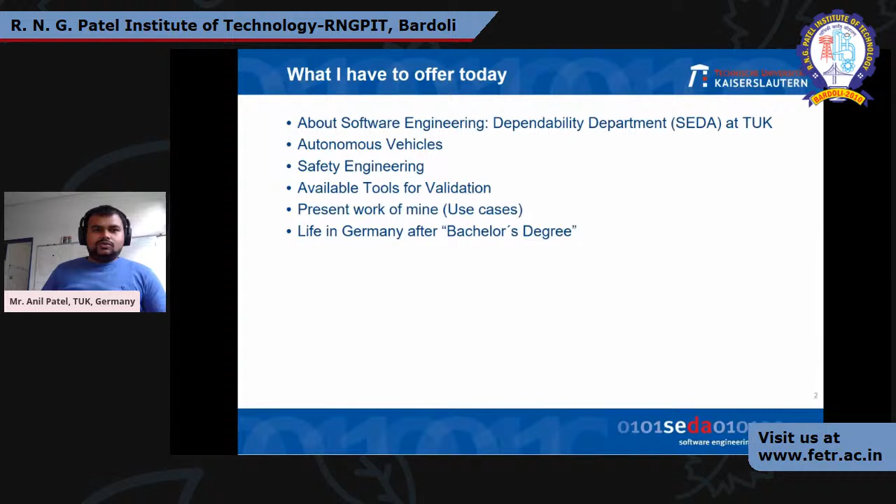So we are the Software Engineering: Dependability Department. Our professor Liggesmeyer is the head of department. He is also director of Fraunhofer Institute for Experimental Software Engineering, which is basically a research institute for innovation in the direction of embedded systems. We also focus on dependability, safety, security, reliability, and availability characteristics of embedded systems, as well as looking for new approaches in dynamic risk assessment.

As well as safety assurance under uncertainty for autonomous systems. Currently, we have two ongoing projects: collaborative embedded systems and virtual engineering of smart embedded systems. My part is dynamic safety management in resilient architecture, which I'm working on right now. You can also look for some information about this research on this link.

So let's start with our topic, which is safety engineering in autonomous vehicles. But before that, we have to find out what is a system and a technical system. A system is the technical and organizational means for the autonomous fulfillment of a task. We can say that whatever hardware, software, people, maintenance, personnel and logistic assistance is considered, it's called a system. So take a railway station or airport where you have an airplane, an air traffic controller, ground personnel for guiding the plane, fuel supply systems, and ticketing—all this is called a system.

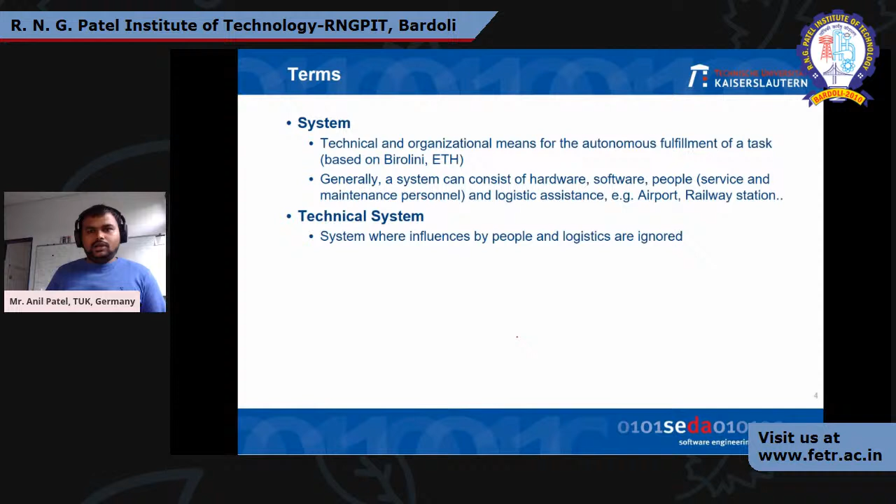Present technical systems have many microprocessors installed, and those vary from not safety critical to safety critical. Not safety critical we can say is your cellular phone, which also has a microprocessor and sensors, but it is not safety critical. Even if your mobile won't work, it doesn't hurt you. However, other safety critical systems are aircrafts, trains, cars, and medical equipment.

Aircraft at 8,000 altitude, if your engine won't work, it's safety critical - lives are in danger. That's why we have to take into account all safety critical systems into safety engineering. And for that, we are evaluating safety, reliability, and availability. But today we are focusing only on cars.

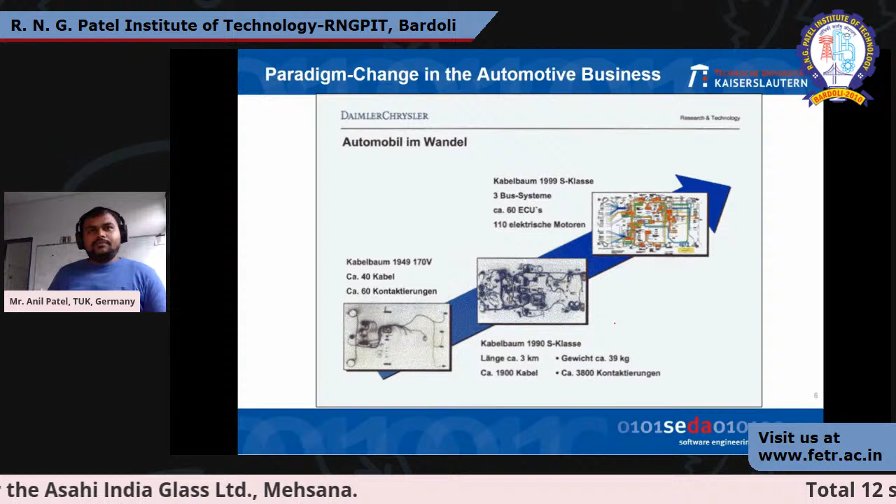So let's look at how the paradigm changed in the automotive business. Let's take a model from 1949 - it has a 40 cable connection and 60 switches. Over the period of years, now we have the 1999 S-Class. There are 3 bus systems, 60 ECUs, and 110 electric motors.

But in present cars, the cumulative length of electric wires in a modern car is more than 4 kilometers compared to a few hundred meters 30 years ago. And in modern cars, up to 150 ECUs are used, in commercial up to 40. So what I mean here is there's been dramatic change from mechanical components to electrical components, and those components are vulnerable to some environmental changes, and those things we are evaluating today.

But before that, I want to share with you one simple video where we can see why we have to evaluate this safety engineering.

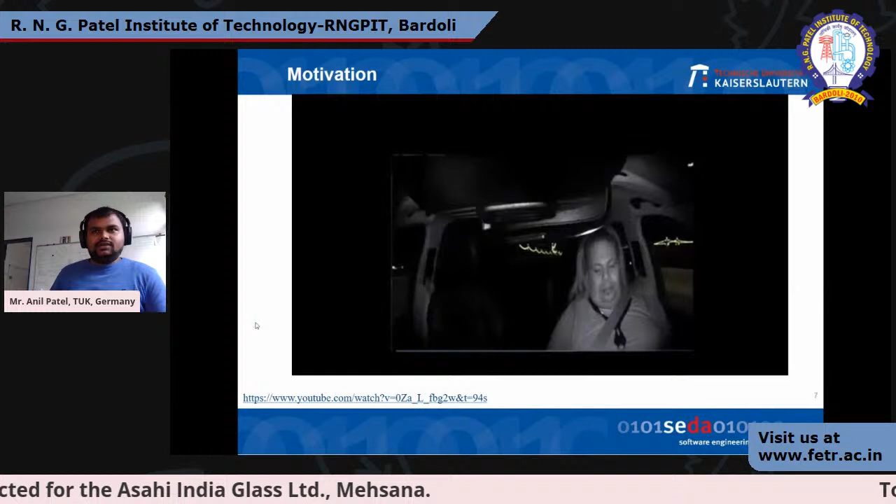You can see the autonomous driving vehicle is colliding with the pedestrian running with her bicycle. From the interior view, the driver is busy with his mobile phone. Maybe he is chatting with someone, and then he has no attention at all on the road. And suddenly when he realized that something happened, time is gone.

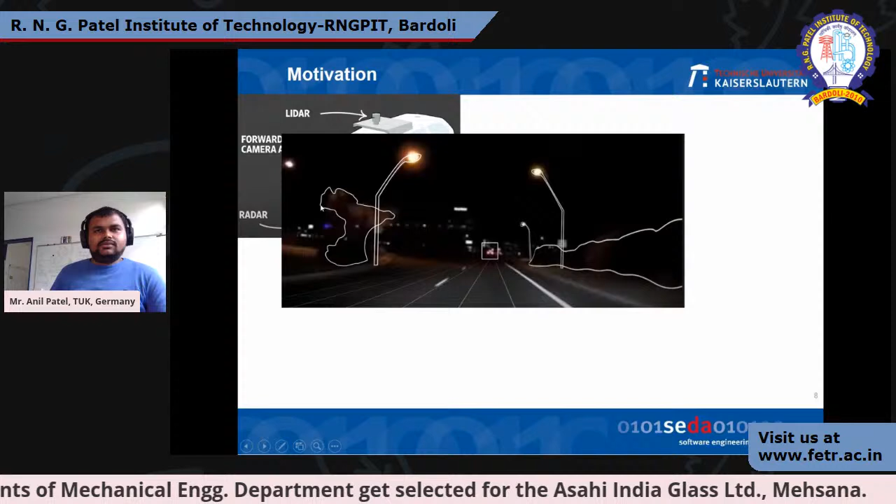So the point is, this car which collided with the pedestrian has 3 main components: one LiDAR on the top, forward camera array on the rear view mirror side, and radar on the front. These 3 components predicted completely the street lights and surrounding environment, vegetation, and all those things. It even detected a vehicle here. However, due to the dark conditions of this environment, it didn't predict the pedestrian.

And when the vehicle saw the bicycle with the pedestrian, it didn't realize that the reaction time was gone. So it collided with the pedestrian, and the pedestrian died at the spot.

This incident happened in the Uber self-driving car. The argument from this incident was that the system detected the pedestrian nearly 6 seconds before impact, but it never classified her as a pedestrian because she was crossing at a location without a crosswalk. So there was no zebra crossing, as you can see from the image. The system considered that jaywalking pedestrians are not included, so it ran over her, and that's why it collided with the pedestrian, and the pedestrian lost her life.

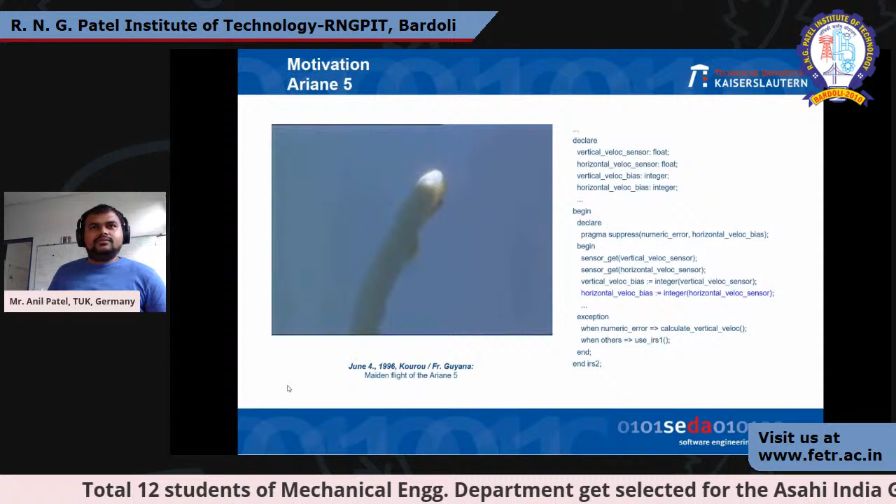Another incident is this video from the Ariane 5 maiden flight from the European Space Agency. So it takes off now, and now it's behaving unstable and gone - it exploded in the environment.

Now what happened here, you can see on the right side of your screen, there is one line of code which is highlighted. The programmer used the same software from the Ariane 4 in the Ariane 5, and an integer value overflow in the programming caused the error. After 37 seconds of engine start, it exploded in the environment, and the total financial loss was 850 million euros.

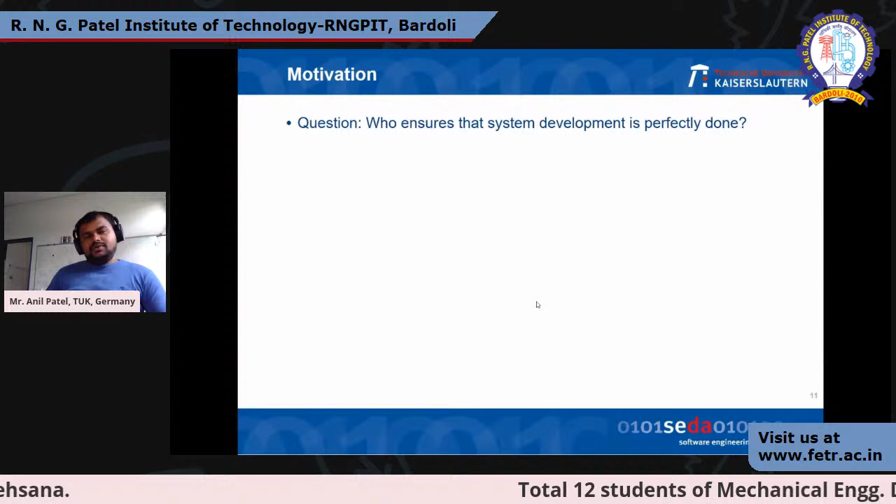The point is, who ensures that system development is perfectly done? The answer is nobody, because it is difficult to develop large complex software and guarantee that hardware and software work perfectly when it comes to environment integration or interactions. A problem occurs that may cause a catastrophic effect in the technical application domain.

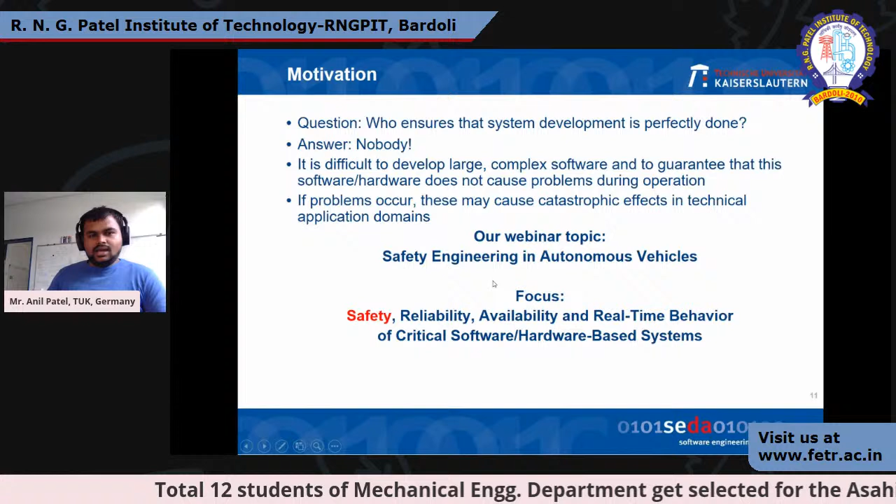And that's why we have to focus on safety engineering for autonomous vehicles. Especially today in this webinar, I'll focus only on safety - how you can find out the safety parameters, what needs to be done to make our autonomous vehicle safe. And to start that, I want to show you a very funny but really interesting video.

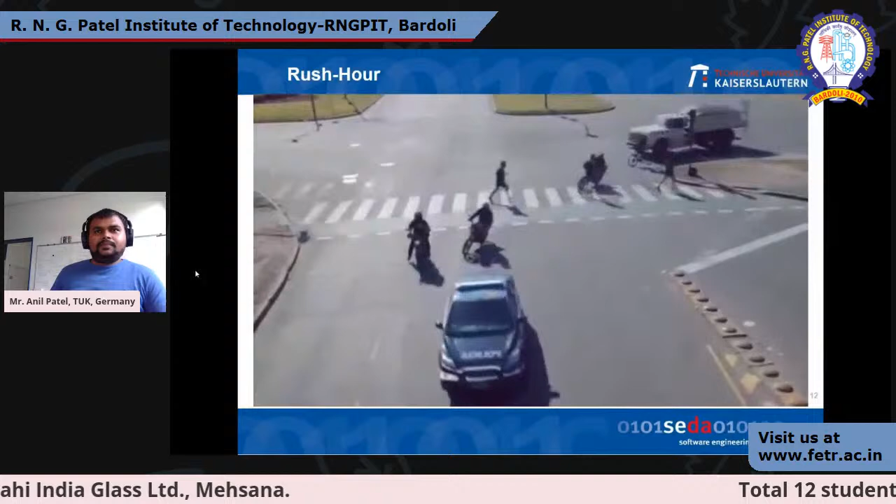So you can see there are many cars ongoing. The audio is not available, unfortunately, but you can see the funny interaction between pedestrian, motorcycle, buses, or some transporter car, and some series of cars ongoing parallelly. No one is hurt at the end, and everyone is interacting in a way that everyone gets their opportunity to just pass on it.

So what I mean here is everything works fine, but as a safety engineer, we have to ask questions. What happens if this pedestrian stops at the zebra crossing? Can the transporter behind stop, or will it just run over him? Or what happens if this transporter just steered left or steered right? What will happen? So those questions we have to ask.

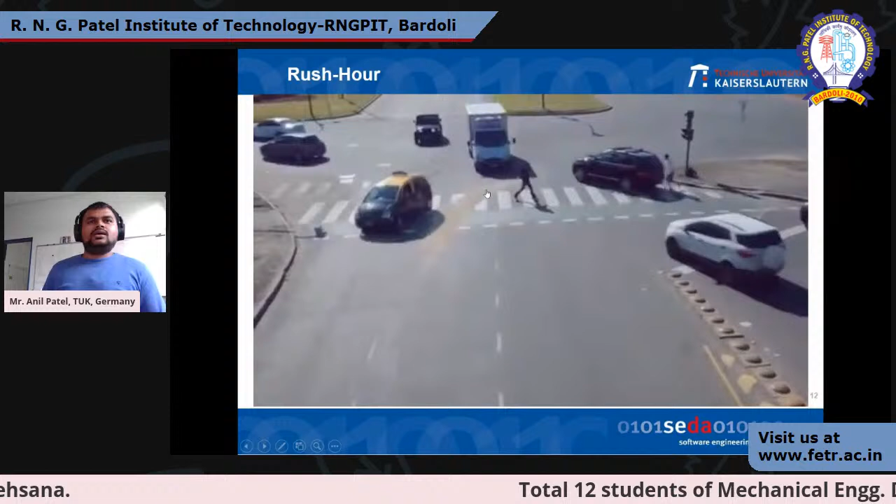Yeah, and definitely in this video, no one got hurt, nothing happened. But somehow this scenario we have to take into account, and that's why safety for autonomous vehicles is really necessary. So what is an autonomous system basically? The term has been used for a long time in the robotics and artificial intelligence research community, but driving automation systems would indeed be autonomous if they perform all of their functions independently and self-sufficiently. But it depends also on how they interact with the outside environment as well.

So the role of the sensing system is to gather data from the environment, and the role of the action system is to maneuver the mechanical parts and actuators to provide the controller logic defined actions. But my point here is that the autonomous system is integrated with this human machine interface. So either you can monitor your system by monitoring the sensor data and filtering it, or otherwise you put in your logic that now you have to turn left or right, or go ahead, something like that. So the HMI allows interaction with the system, the controller logic which controls the system and takes necessary safety critical decisions by using the data.

What happens in an autonomous system is everything is done by the system. The system will monitor, as well as put logic into account, and then it behaves autonomously without any human interaction. So the autonomous system consists of the sensing system, human machine interface, and action system. But the problem occurs when there is a task differentiation. So what kind of task do I have to monitor, and what kind of logic do I have to implement? So there comes the level of autonomy.

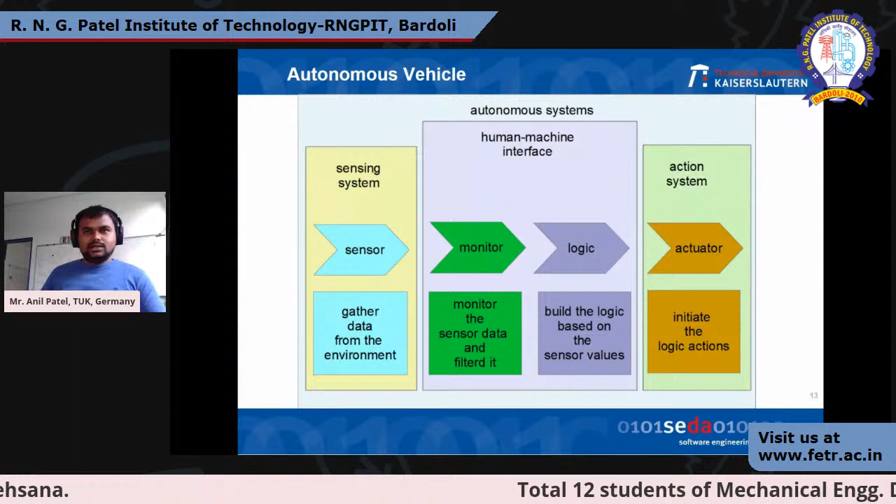So for some part of the driving task, do I have to monitor the vehicle, or for some part of the driving task, do I just leave it to the system? So the level of autonomy is defined by the responsibility of the autonomous task to certain limits between the system and the user. It also involves the duty of collecting necessary data. So you watch that there is no pedestrian, the vehicle can drive ahead, and suddenly the vehicle stops, you can also take over. So likewise, you can also take some corrective measures, as well as monitor the environment and perform the necessary actions. So the level of autonomy consists of two kinds of situations.

First is the different safety critical functions. In autonomous vehicles, we have mainly three operations: either you accelerate, brake, or steer, right? And those safety critical control functions can work without the driver, which means you can leave it to the system, or you have other safety warnings, which we can say park assist, too close to the front, or some kind of attention to the driver. So there are two kinds of level of autonomy. One takes the action into account, and one provides an alert message to the driver that now you are in a safety critical situation, you have to take over from me.

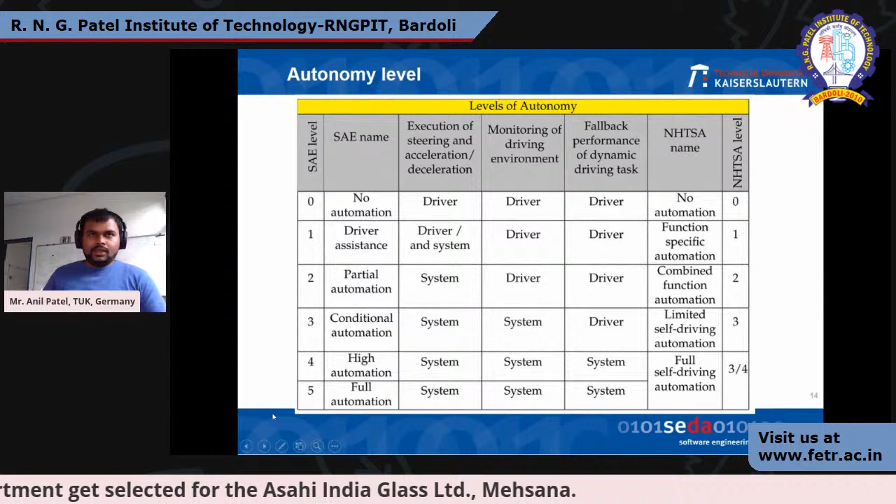And also the level of autonomy has been classified by two different organizations. As you can see on the left side, it's the SAE level, which is the Society of Automotive Engineers, and on the right side, it is the NHTSA level, which is the National Highway Traffic Safety Administration. More or less, both organizations have classified clearly, except levels 4 and 5. NHTSA defines the level of autonomy from a vehicle that does not have any control, level 0, to the fully automated system, level 4.

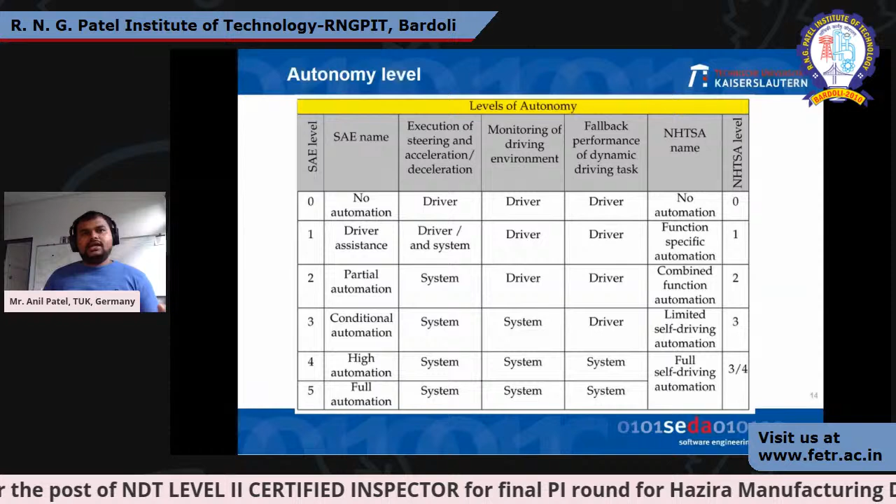But for high automation at level 4 in SAE, the execution and monitoring and also performance fallback, which means if there is a failure, you have to have a backup plan for the system, happens in the system in level 4. How level 4 differs from level 5 is that level 4 is only for an operational design domain. So you can only use level 4 in certain operational environments, like on highways or in a pre-designed environment. But level 5, you can put this vehicle anywhere on the road, and it behaves the way we designed.

So all system fallbacks and performance monitoring can be done at this level. This level of autonomy also differs with safety and technical safety. How does it differ? The definition of safety is freedom from those conditions that can cause death, injury, occupational illness, or any kind of damage to the environment. Well, I will go with the absence of unacceptable risk, which is very small.

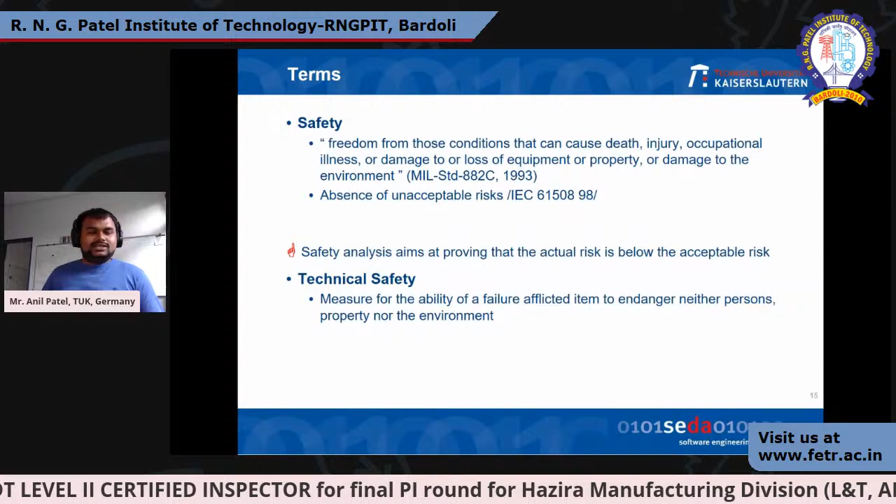However, you can see absence of unacceptable risk is very generalized. I mean, some risk is unacceptable for me, and for you it's different. So we have to consider a standard then. There comes the standard where everyone agrees that this is an unacceptable risk. But as system and technical system, safety and technical safety also differ.

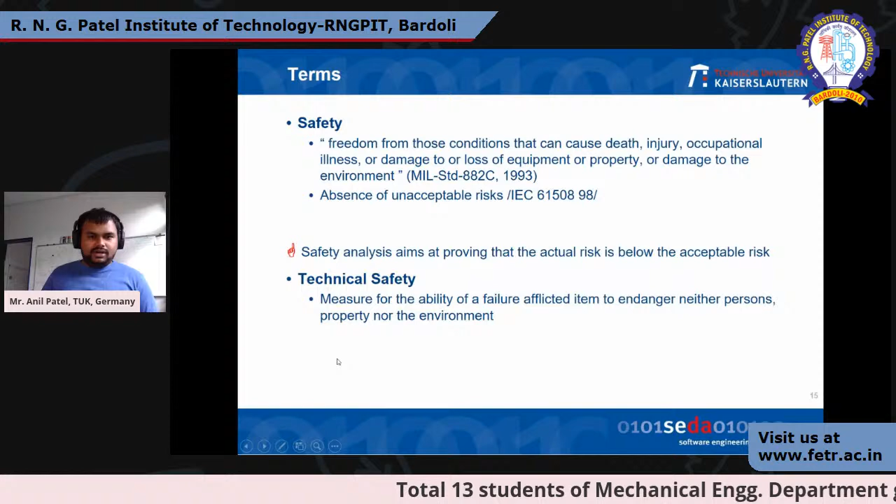In technical safety, it's a measure for the ability of a failure-affected item to endanger neither person, property, nor the environment. So technical safety means your system cannot endanger any person, any property, or any kind of environment. It includes everything. So it has to behave in a way that provides certain safety to the user as well as to the environment, right? But before that, I have to put some definitions here so that you can better understand what I'm going to present.

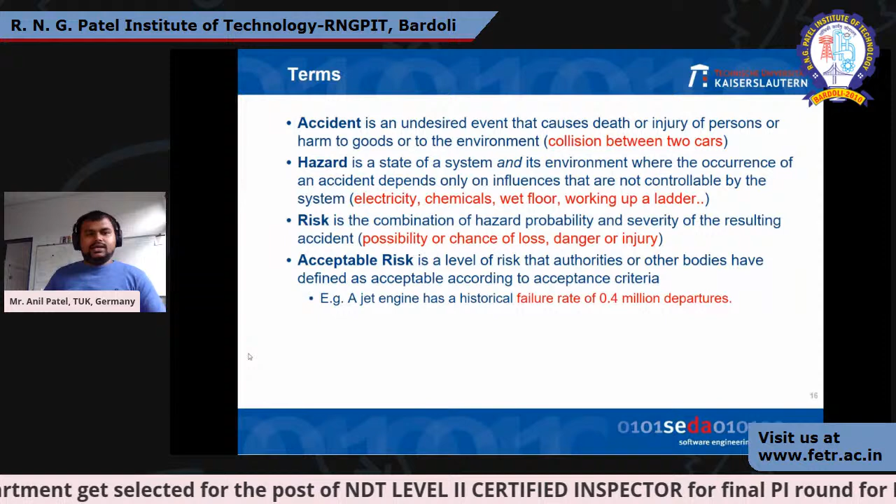Accident: everybody knows that if there is a collision between two cars, we call it an accident. Hazard means some electric shock, a chemical reaction, or you fall down on a wet floor or working up a ladder, which we call a hazard. Risk here is a possibility or chance of loss. So on a wet floor, you fall down and you might have a bone injury or something like that. So it's an injury, or you have a chemical reaction and you just die. So it's a loss of life, right?

Well, I will go with acceptable risk because it's a level of risk that authorities or other bodies have defined. Why do I have to go with this? Because it precisely mentions that a jet engine has a historical failure rate of one per 0.4 million departures. It means in 0.4 million departures, a jet engine fails one time. It has a value of 0.4 million departures, which is very convincing and which can be argued. But how can we find out this failure rate?

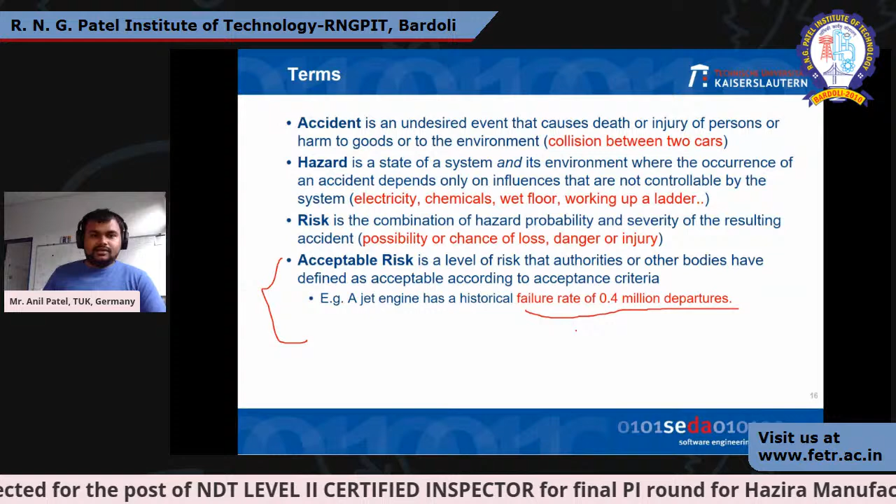Some of you say that my self-driving car drove 1,000 kilometers and it had no failures, and some of you also argue that I put millions of kilometers on these self-driving cars and nothing happened. The argument is that the jet engine works in the same environment domain. If you fly from India, New Delhi, or from Europe, the environment around the jet engine is the same. But when it comes to autonomous vehicles, if your failure rate is 0.4 million in Europe, it won't be the same in India or in other parts of the world. So we have to find out that parameter for each country.

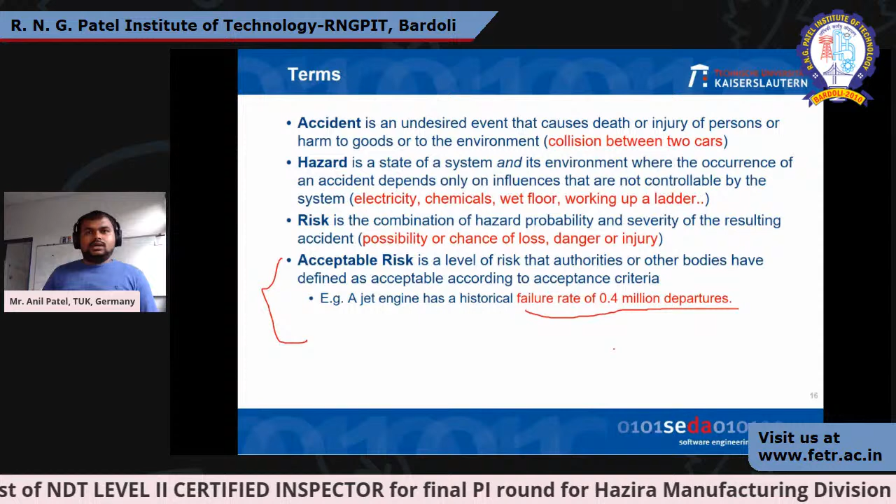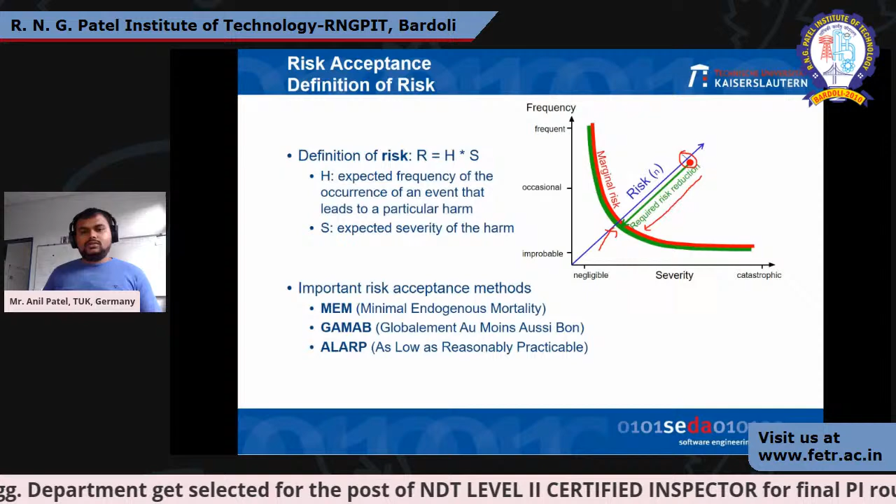To do that, we have three kinds of methods: MEM, which is minimal endogenous mortality, GAMAB, and as low as reasonably practicable. The frequency can be quantified by probability or rates, with methods for finding or modeling harmful events. Due to the potential variety in possible harms, the severity of harm can be quantified only on a very subjective basis. Some argue this is more severe, for me it's not, and so on. So here also the standard comes into the picture. Therefore, comparison of a given risk caused by a particular system with acceptable risk values is very subjective.

The aim of risk acceptance is to bring about a decision in a systematic and founded fashion whether the risk under consideration can be accepted or not. In the latter case, the system causing the risk cannot be put into operation. So if you are above the red line, it cannot be put into operation. You can only put it into operation when it is below the green line. So this is how you can define the risk acceptance for your particular system. For safety-critical systems, that might be defined with different parameters, like the degree of benefit, such as great distance in aviation.

So two planes cannot collide in the air because there is a huge distance in between, but cars can collide because there is no such kind of possibility. Who is at risk? So you can say the sick person is at risk, astronauts outside of the space stations, travelers, something like that.

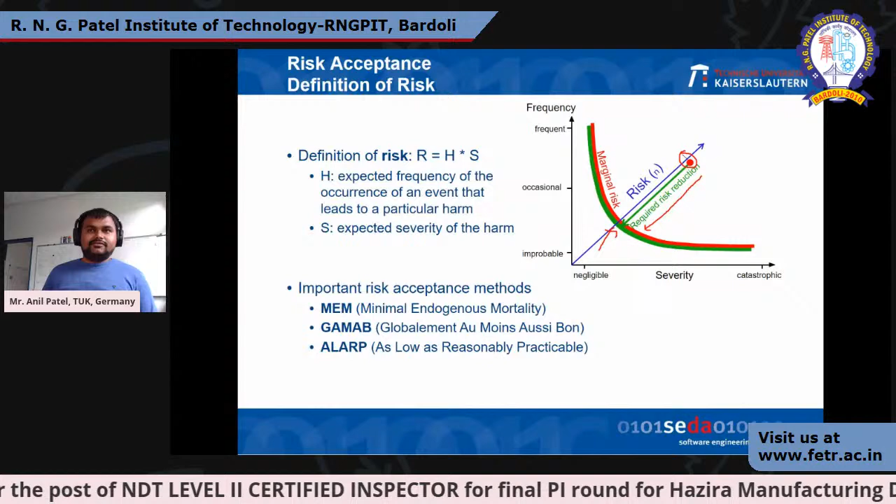And degree of self-determination: driving a car versus taking an elevator. So how much risk is there? How many people are at risk, compared to a car versus a nuclear plant? So you also have to find out how many people are at risk. And then last is severity. So is it an injury, or is a person completely lost, death or injury?

So these are the parameters that influence risk acceptance, and we have to take them into consideration when it comes to autonomous vehicles. And for that, we have to find out what kind of failure, fault, and error there is in the system. So let's say failure is the inconsistent behavior with respect to specified time behavior while running a system. So each failure is a timestamp.

It's like you have an airbag system, and within 10 milliseconds, when you collide with the other vehicle, it has to blow, and it has to save the passenger inside the car, but it didn't detect the collision, and the airbag system fails. So it's called failure. What is the fault inside it?

So the programmer who programmed the microprocessor put 20 milliseconds instead of 10 milliseconds. So the requirement was 10 milliseconds after collision for the airbag to blow, but somehow this programmer put 20 milliseconds, so it didn't blow after 10 milliseconds, and at the same time the passenger hit his or her head on the steering, so we cannot save the passenger. The error was because of this fault.

We misunderstood the statement, and we introduced a bug into the program, and therefore it causes an error in the microprocessor. The microprocessor didn't react because it has a 20 millisecond reaction time, and that's how the fault occurs. Error occurs. Error causes the failure, which leads to a hazard. So this is how it flows from the fault injected by the programmer to the failure in the system.

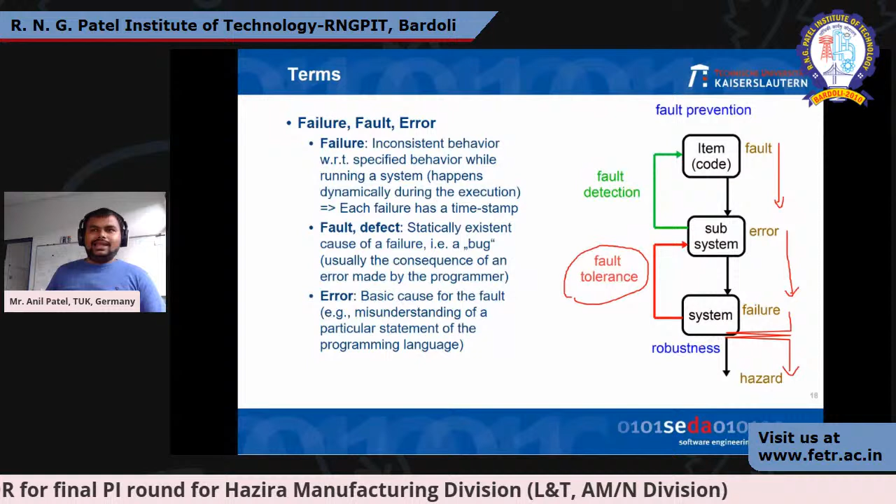Now, what is fault tolerance in this system? So you can handle system failures due to occurring faults under operational conditions and enable the driver to get a safe stop. So let's say you have a failure in throttle pedal control, and then you don't know how to accelerate. Suddenly you know that the throttle pedal position, the acceleration pedal, won't work. And there comes the fault tolerance system, which has a backup plan, a redundant system. It activates the redundant system and safely maneuvers the driver to the side of the roadway.

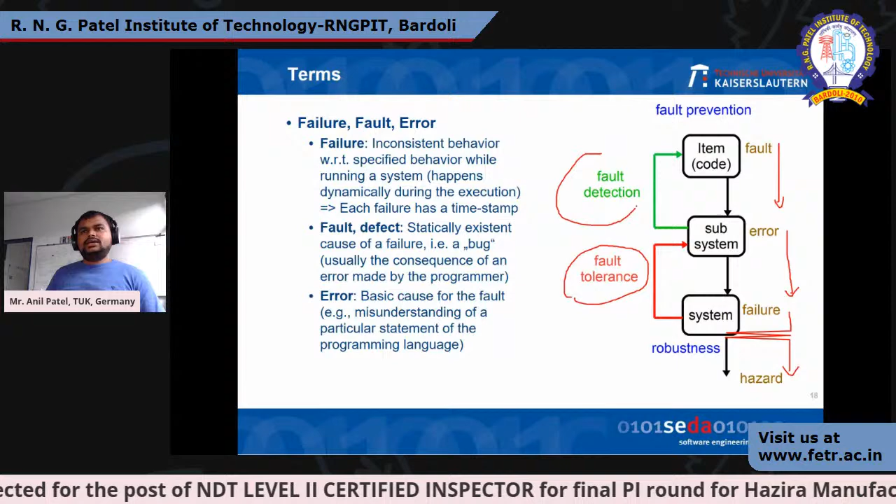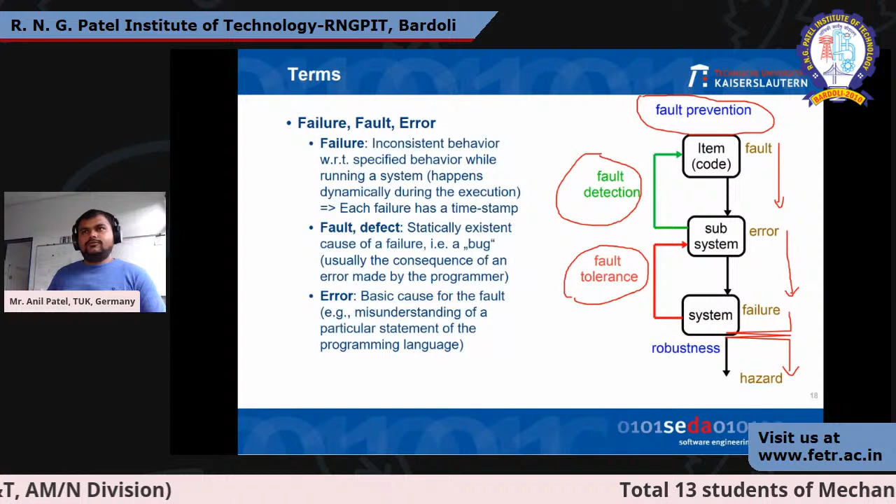What is fault detection here? So it detects and alarms the driver that there is a failure in the throttle pedal position. It discovers the fault in hardware or software by triggering alarms for manual intervention or initiating automatic recovery. Fault prevention is to prevent such an error or bug in the program code. So we have to establish mechanisms that prevent faulty inputs or conditions from introducing those faults into the program.

Now, to do that, we have to build a system from scratch, and for that we follow the V model. The V model starts from requirements, which lead to the system design, and the system designer then sends the concept to the architecture designer. The architecture designer will build the architecture and then define certain modules. So let's say we have an autonomous vehicle. The system designer develops certain systems, the architecture designer develops the architecture, and the module designer defines that this is the engine module, this is a transmission module, this is an electric module, and so on.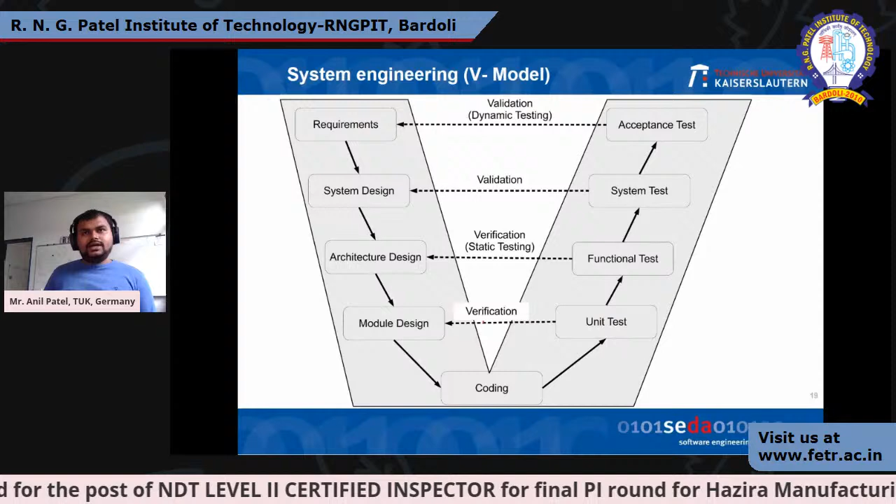And after the bifurcation into modules, the coding happens at the center part of the V model. Then we perform unit tests for each module. We check how the program behaves, which we can call static testing. Static testing is just a verification stage to see how the code is examined without being executed. So in the verification process, code will not execute. The code will execute in dynamic testing to check whether the system fulfills its requirements or not.

So these requirements are very necessary when it comes to safety engineering, because they define how safe a system you want. If you don't put safety requirements here, the engineer won't know how safe you want it, the design goes outside of the scope, and you get a different result at the acceptance test, which you don't want. So we have to look at this requirement section, and for that I will take a small example to understand it briefly.

Let's take the ACC functionality, which is adaptive cruise control in the autonomous vehicle. We have one car which drives at 80 km/h at a distance of, let's say, 120 meters, and then there is a leading vehicle.

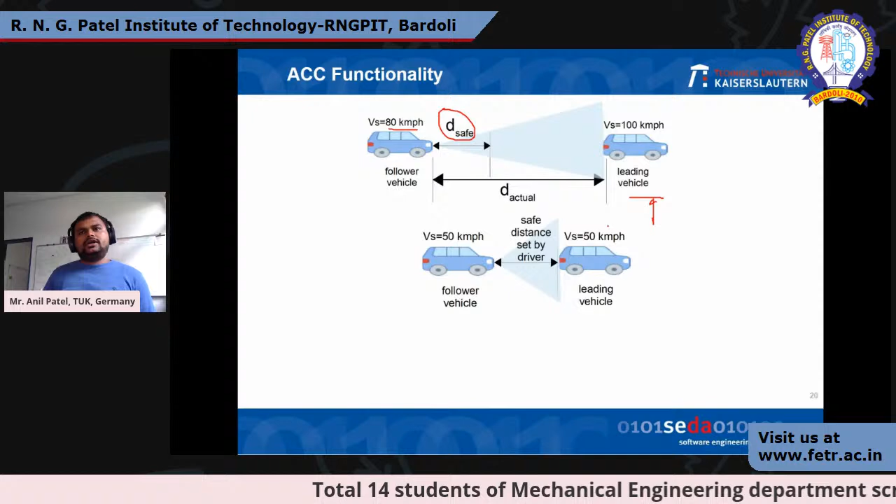So what ACC does is you have to set a speed, which is 80 km/h, and you have to set a safe distance. So the vehicle has to maintain this safe distance to the leading vehicle, right? But what ACC also does is perform acceleration and braking operations simultaneously. So when the leading vehicle slows down, from 100 to 50, your distance will minimize, right? And then the ACC system will maintain the safe distance set by the driver and follow the same speed

as the leading vehicle. Once this leading vehicle accelerates again, let's say from 50 to 100, there is again a huge distance in front of the following vehicle. It again accelerates from 60 to 80. Okay. So why do we need ACC?

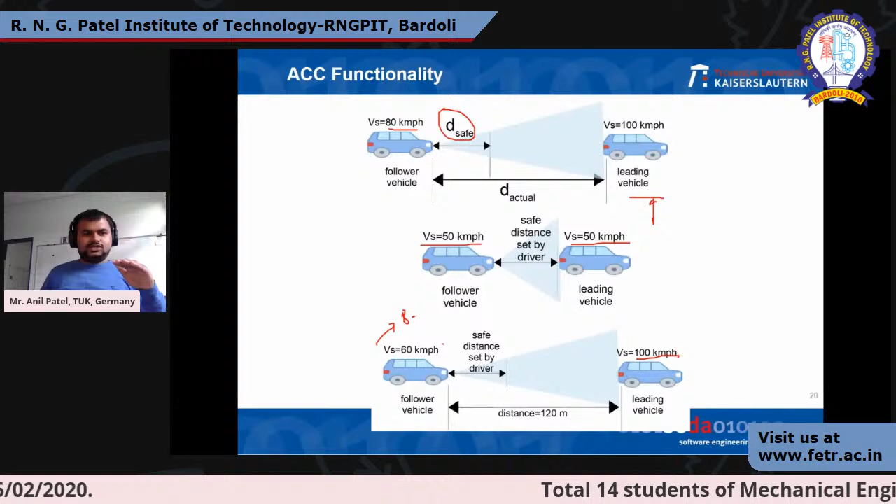So you're doing acceleration and braking operations during your driving. ACC will take over those operations and make driving consistent. In mechanics, we can see that constant acceleration or velocity can save fuel consumption. So that's why ACC is used.

I built a small architecture on this functionality. Let's say this is the set speed set by the driver and the set distance also set by the driver, and the ACC logic controller. This logic controller has three kinds of units: engine control unit, braking control unit, and distance control unit.

This engine control unit also has three components. Let's say throttle pedal position sensor, engine speed sensor, and engine fuel pressure sensor. Okay. For the sake of simplicity, we exclude other components like this. We only included the orange ones, which are safety critical components.

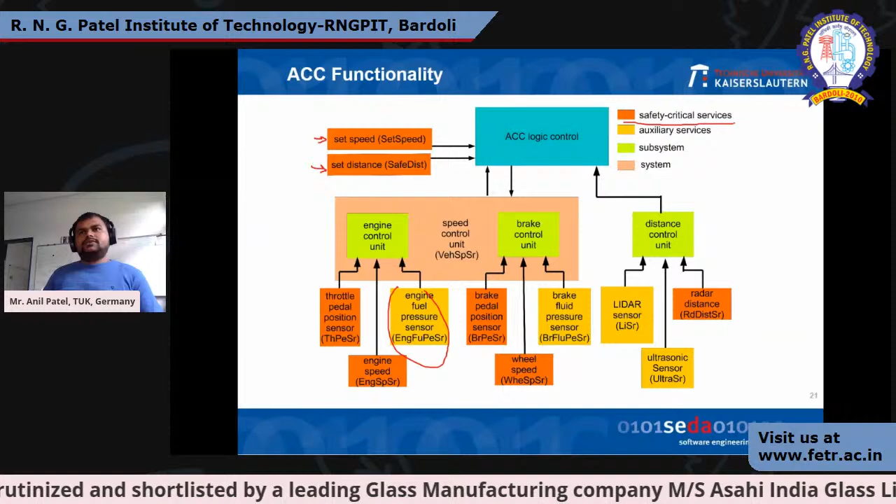Okay. To do the refinement of the safety requirements, we first have to perform hazard analysis and risk assessment. Why do we need to do that? Because it defines our safety goals, how safe we want the system to be. And from the safety goals, we know the functional safety requirements for that particular ACC system. And in that ACC system, we also need to find out the technical safety requirements for hardware as well as for software. So let's start with the hazard analysis and safety requirements.

The process is also explained in ISO 26262. So the determination of safety goals as part of the hazard analysis and risk assessment is in the concept phase as well as in the development phase. So to do that, I put a small example here. Let's say we have a wheel speed sensor. It has an omission. Okay. Omission is an absence of signal, so you don't know your wheel speed when your vehicle speed is greater than 50 km/h or your safe distance is less than 10 meters.

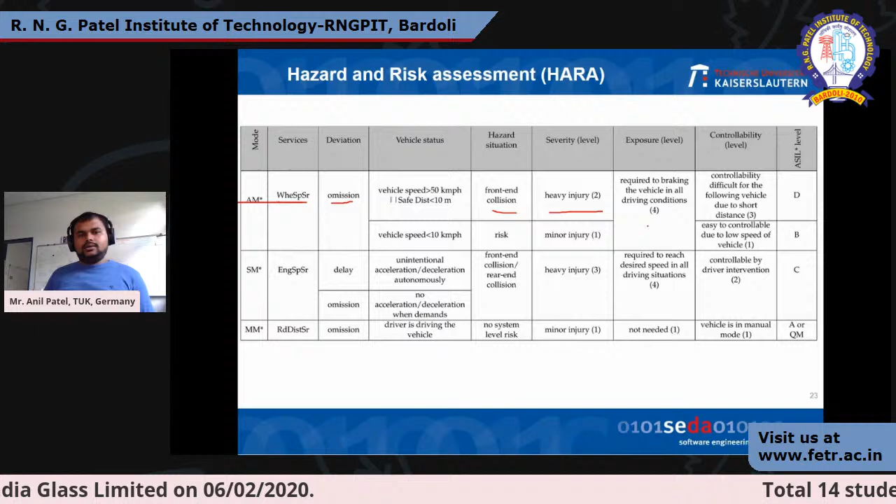What is the hazardous situation here? You have a front end collision, right? And the severity is, when you have a front end collision, you have a heavy injury. You might call it loss of life, or maybe you have a head injury because of the front end collision. The exposure level is that you always require the wheel speed sensor, because for the braking operation you need to know the wheel speed, and then based on that, you have to put brake or fluid pressure into the valve and compressor.

The controllability: because there is very little distance in front of you, the controllability is very low, so we put it as 3. And based on this 2, 4, and 3, we have an ASIL level. ASIL is the automotive safety integrity level, which defines different safety integrity levels for different safety critical scenarios. According to ISO 26262, which is a standard, the associated risk to the electric and electronic system needs to be identified. As we can see, the wheel speed sensor is part of the electronic system.

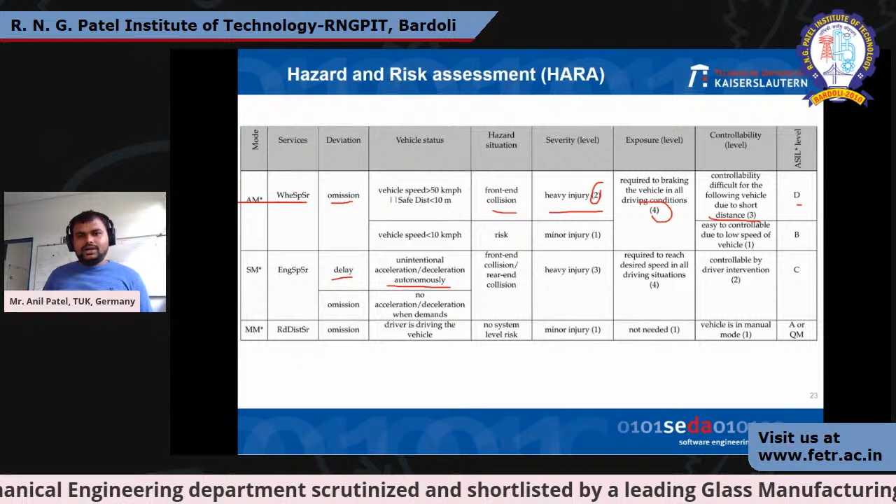The potential risk is identified before the design phase. So we are designing the system. Now, during that design phase, we have to find out what happens if our wheel speed sensor has an omission. For this, the hazard and risk assessment method is used. And it also includes the influencing factors. As you can see, I put engine speed sensor delay. Then I put unintentional acceleration. So we don't want acceleration, but somehow the system accelerates and decelerates. We have to take those things into account to find out the functional safety requirements for the vehicle system.

So based on the hazard and operability analysis, there are 4 kinds of deviations. The deviations are here. Omission is an absence of signal. There is commission, which is an unexpected emission of a signal. The wrong value, which is more or less, so you don't know whether the value from the sensor is correct or not.

So I also call it omission. And there is a delay, so the timing delay in a signal. So these are the guide words we use for hazard analysis and risk assessment. There is also one method called failure mode and effect analysis, which is for safety assessment, which is very necessary.

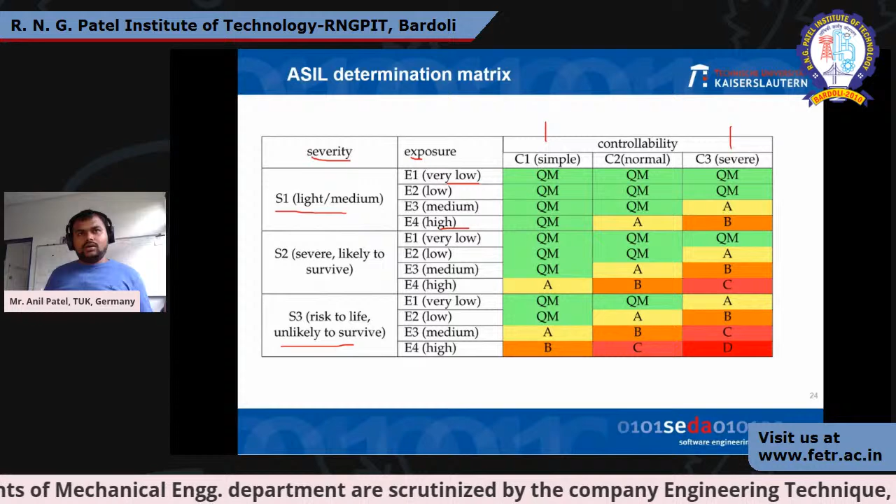So to do that, the result of this evaluation can be classified based on the ASIL level, which is QM, ASIL A, B, C, and D. The severity is what is the severity in the event, as I already explained to you. Exposure, how often do we have to drive in these situations? Like the wheel speed sensor should always be there because it is required for the braking operation. Controllability, how well the driver or system can control the hazard in the event of failure, or how it can be avoided. So it's a measure by which we can avoid the severity.

Okay. So let's take a small example to find out the functional safety requirements for ACC. Let's say we have a safety requirement of ACC, which is called avoid unintended acceleration, which leads to a hazard, which is the highest, ASIL D level. Okay, to do that, we have two different safety requirements. One is for the driver assistance system, which is DAS, and one is for the engine control level.

So to avoid unintended acceleration, the functional safety requirement for the driver assistance system is avoid unintended ACC acceleration request beyond the range. So you have a range from 1 to 1.5, and if this acceleration goes beyond that range, you have to stop your functionalities, right? On the safety requirement side for engine control, it is keep the acceleration request within the range.

Then you further bifurcate your functional safety requirement into the technical safety requirement. And then you say fault within the ACC system detected, and the ACC system has to be deactivated. So the fault is detected in the ACC system, and now your DAS, which is the driver assistance system, has to deactivate the ACC system because of the failure in the system.

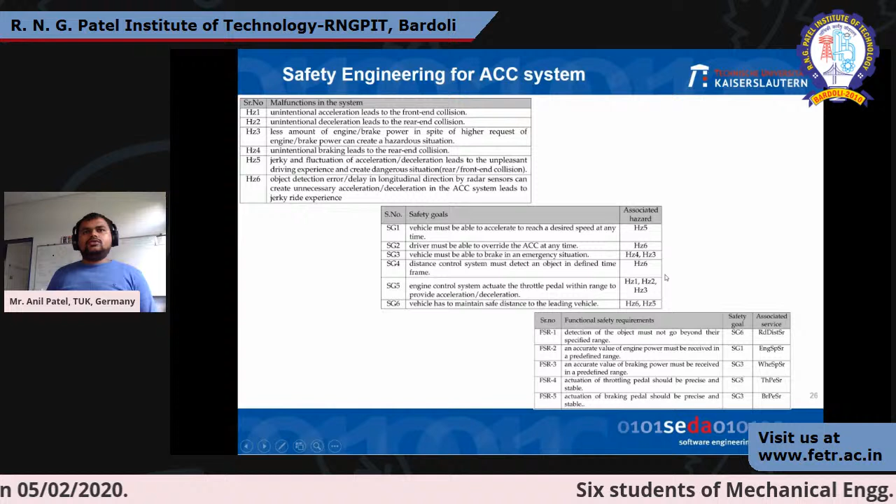Then you merge those, just a minute, then you merge those hazard malfunctions with the safety goals. The safety goal is the vehicle must be able to accelerate to reach a desired speed at any time. So this safety goal belongs to hazard 5.

What is hazard 5? It says that jerky fluctuation of acceleration or deceleration leads to an unpleasant driving experience or creates a dangerous situation for front or rear end collision. Of course, yeah. And to define that, we also have a functional safety requirement, which is also derived from the safety goal. So let's say our first functional safety requirement is that detection of the object must not go beyond its specified range.

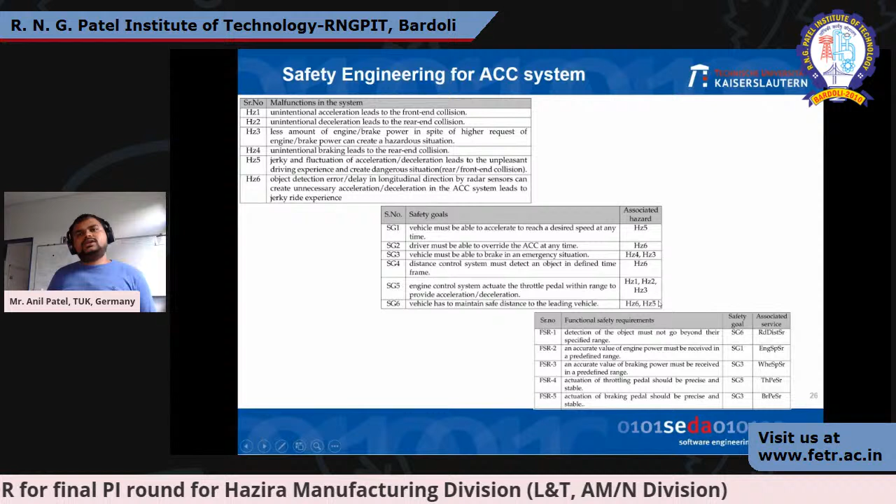And it belongs to safety goal 6. What is safety goal 6? The vehicle has to maintain a safe distance to the leading vehicle. It's also associated with hazard 5 and 6, which state that object detection error can be hazardous, causing a jerky ride or harm to the user. So this is how you refine your safety requirements from the hazardous goals to the safety hazardous situation, and from the safety goals to the functional safety requirement.

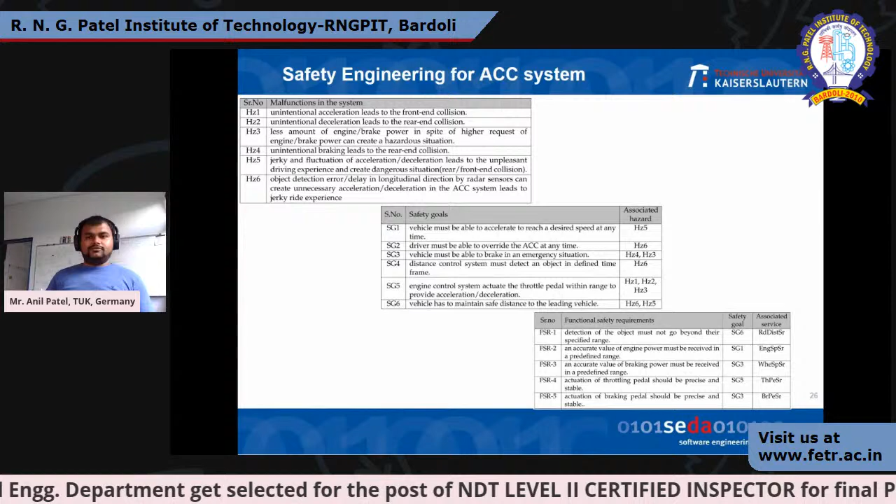To identify more refined safety requirements for the ACC system, the overall vehicle was also used to determine the safety goals. After performing an intensive HARA method on the ACC system, the following malfunctions, HZ 1 to 6, can be defined as potential hazards. The determined potential hazards lead to the development of safety goals. Then, to classify the system duty for developing the safety concept, we find the functional safety requirements of the system, defined based on the safety goals at every level of abstraction of the vehicle system. This is how you do safety engineering for particular ACC system functionalities.

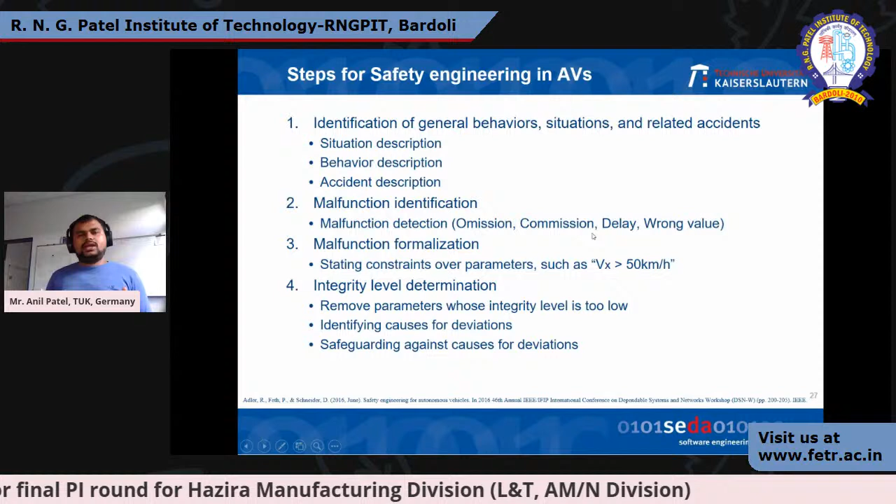To simplify this into 4 steps: first, identification of general behaviors, situations and related accidents, which you write down and put into the database. You also identify malfunctions by detecting deviations like omission, commission, delay, or wrong value. Then you formalize the malfunction, determining at what speed and distance this malfunction becomes hazardous.

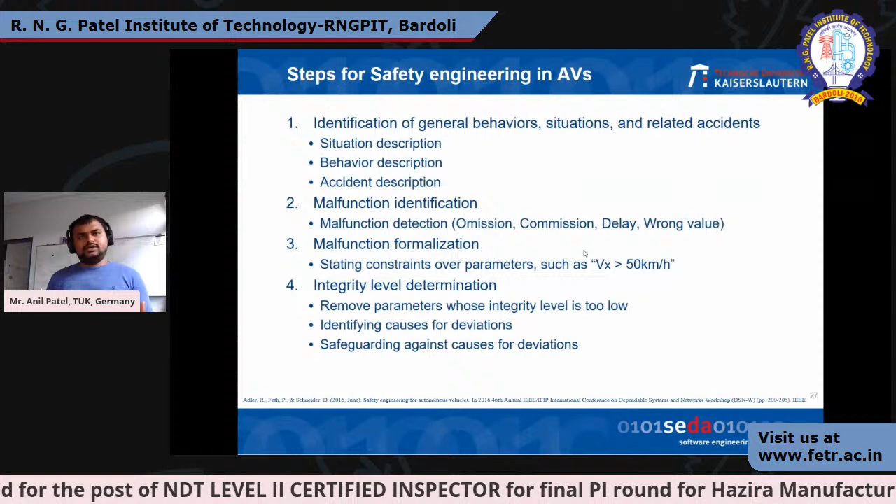Then you include integrity level determination, which is ASIL, automotive safety integrity level determination. In the design phase you include all parameters, but in the refinement process you remove those parameters whose integrity level is too low. So let's say QM or A should not be included when it comes to safety engineering. Then you identify the cause for those deviations and find a concept for safeguarding against any kind of deviation in that particular concept.

And to do that, I put some of the ideas into practice. Let's see. I put this ACC on a curve road.

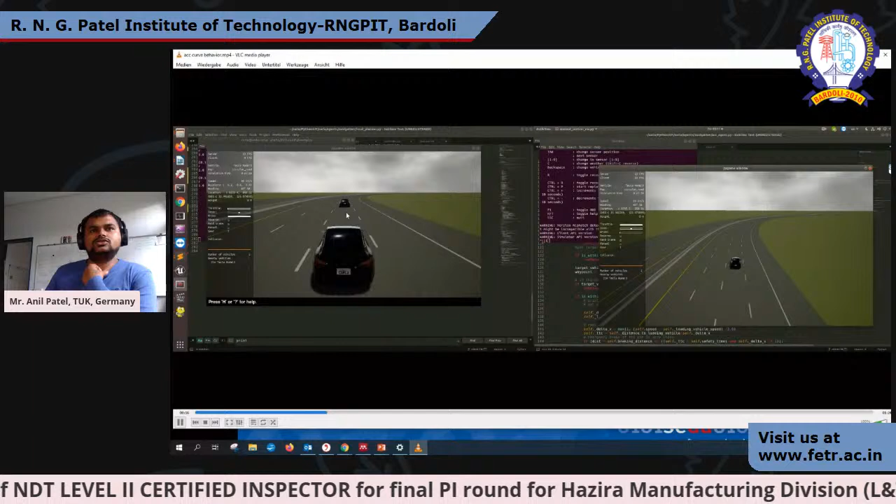So there are two vehicles, one leading vehicle and one following vehicle. The following vehicle only starts when the distance defined by the user is satisfied. Once this distance is satisfied, the vehicle drives, and it also brakes when the leading vehicle stops. You can see throttle, steering and braking happening. Throttling happens because there is distance, and braking happens because the leading vehicle stops. This is how you can simplify your functionalities as well as check the safety concept.

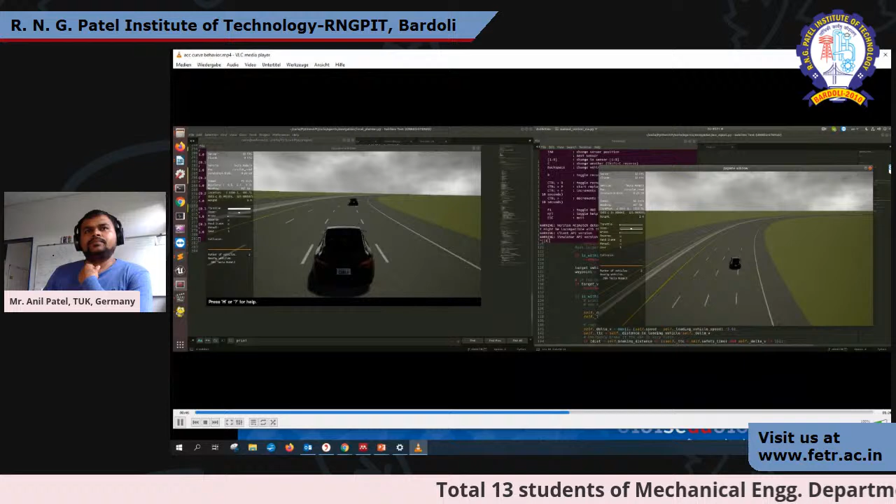You can see from the right side of the screen that the leading vehicle goes outside the lane, creating an unnecessary reaction for the ACC logic. The following vehicle, on the left side, immediately responds and brakes before it collides with the leading vehicle. This is how you can put safety engineering into an autonomous vehicle and see how it behaves in a virtual environment.

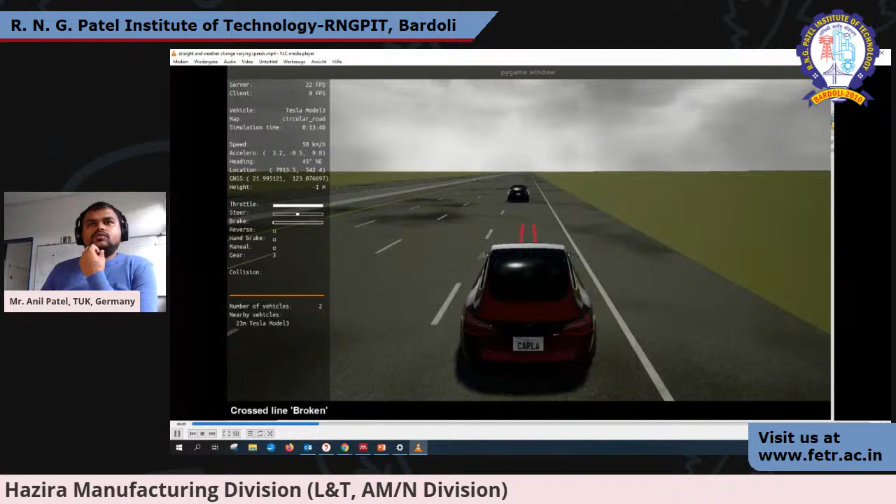I also put some weather change during driving. Let's say weather impacts different sensors, causing some kind of visibility loss where the camera sensor won't work. At that time, we have to use LiDAR or radar sensors. As you can see from this virtual environment, it's showing rain, though it may not be very visible to you, but it's raining and the system is still working. My ACC model handles it completely fine, and it stops before colliding with the leading vehicle.

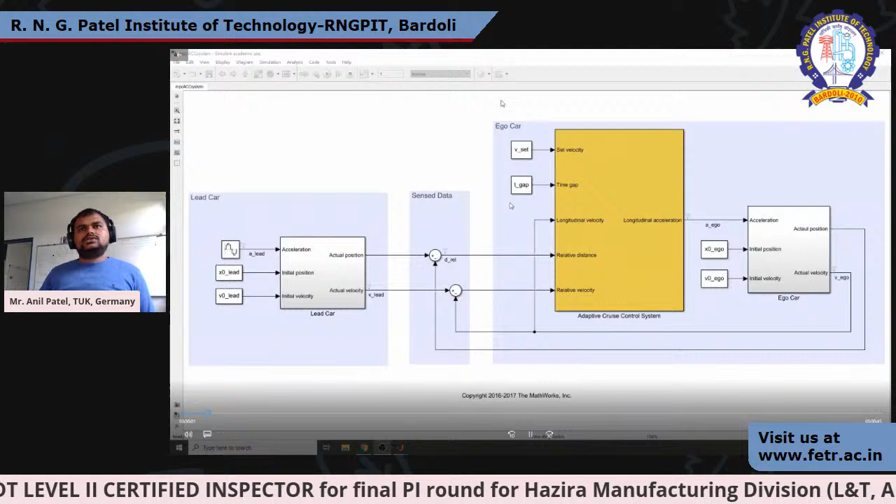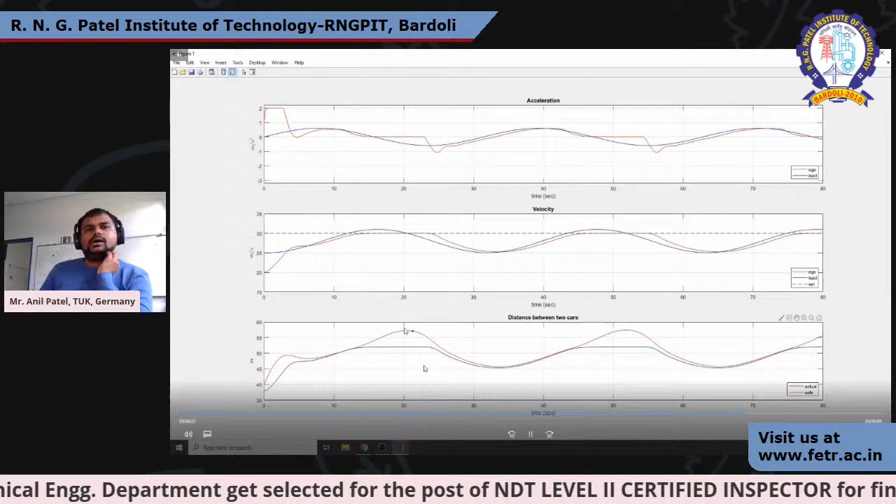Some implementation I also did in the MATLAB environment. These examples are already implemented there. Let's say you have an ego car, a leading car, and sensor data, then you simply simulate your adaptive cruise control, which gives different acceleration and velocity profiles. The red one is the ego car and the blue one is the leading car. When the leading car accelerates, my ego car also accelerates. When the leading car brakes, my ego vehicle also brakes, maintaining a distance between the two cars, as you can see here. It won't collide with the leading vehicle in this algorithm either.

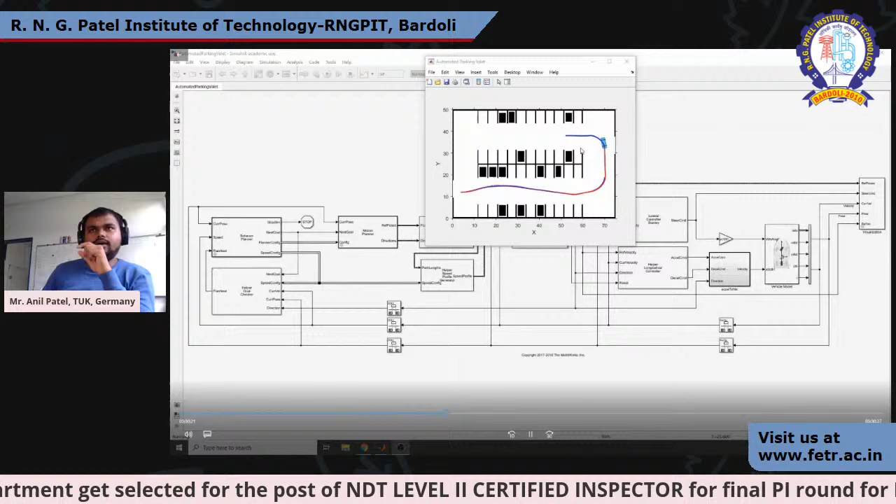I also implemented this same concept for automated parking valet, where you can park your car without going to the parking place yourself. You just put the indicator on, and your vehicle drives away. The question might arise, why park somewhere else when there are empty spaces here? The idea is to show that even if all places are full, my vehicle will go to the place it intends to go, and it precisely maneuvers the vehicle in the required way without harming other elements in the surrounding environment.

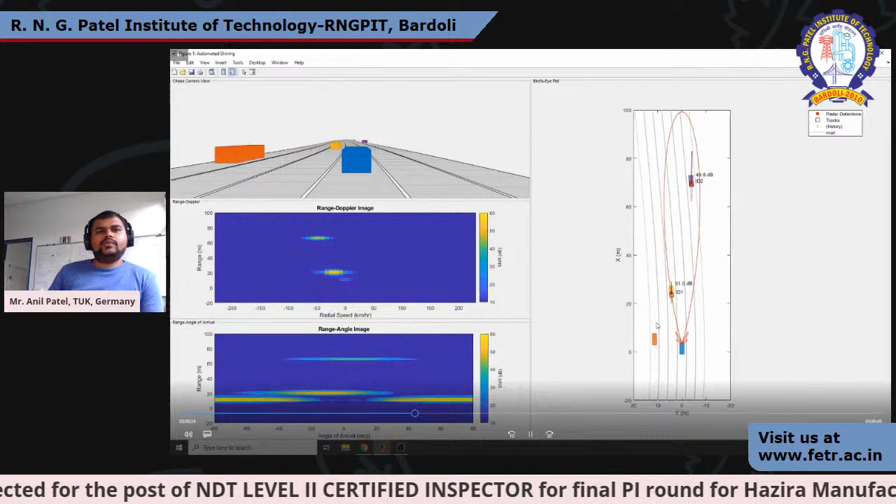The problem is when the orange vehicle just passes the blue vehicle, there's an error in the radar sensor. Even if there is no vehicle on our right side, the radar still detects an object. So it's a failure, and we cannot consider that sensor value in our algorithm. These are things we have to evaluate in this virtual environment.

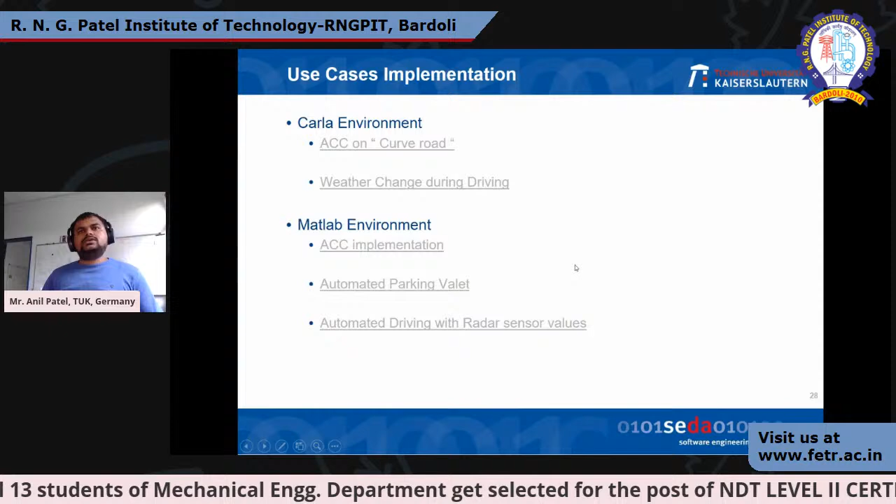By showing these kinds of videos, I want to show you the implementation part of autonomous vehicle safety concept development. But there are still some open scenarios and uncertainties where we cannot work on.

For example, in scenario 1, if you are driving behind your leading vehicle and suddenly water splashes occur, we know that radar sensor values deteriorate during water splashes. It can detect that as an object, and suddenly you brake your vehicle, which can cause a rear end collision.

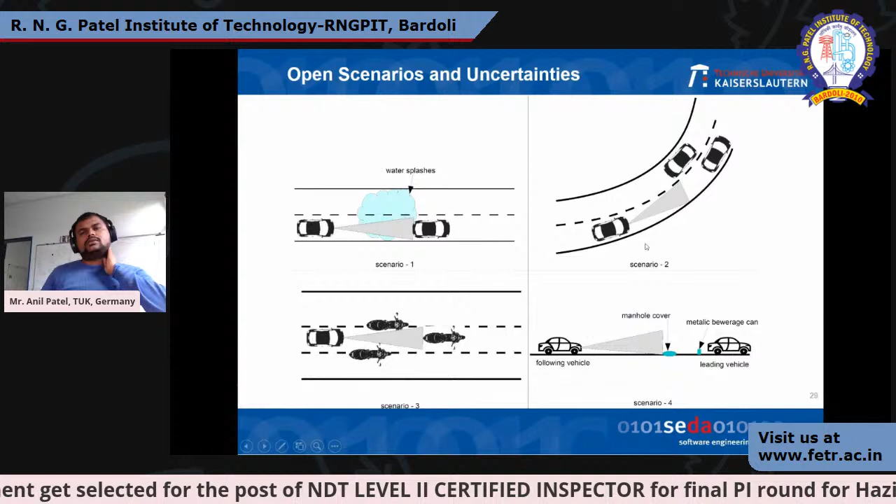Some scenarios like a curve road scenario happen when your radar angle goes outside of the curve road. It can also create a hazardous situation in this kind of scenario.

Some bike riders outside of radar ranges, or metallic components on the road vehicle, can also create chaos in this environment. So there are some open scenarios and uncertainties when it comes to autonomous vehicles, but it can be possible to overcome these with different safety concepts and ideas.

Now I want to discuss the challenges for AVs. The first is support infrastructure. We don't have the kind of infrastructure where you can put any vehicle anywhere on the planet and test it, because traffic signs differ, road markings differ, types of road surface, bridge restrictions, and sometimes if you drive in a tunnel, the video camera or radar might detect a ghost object, which is very critical for the algorithm to identify.

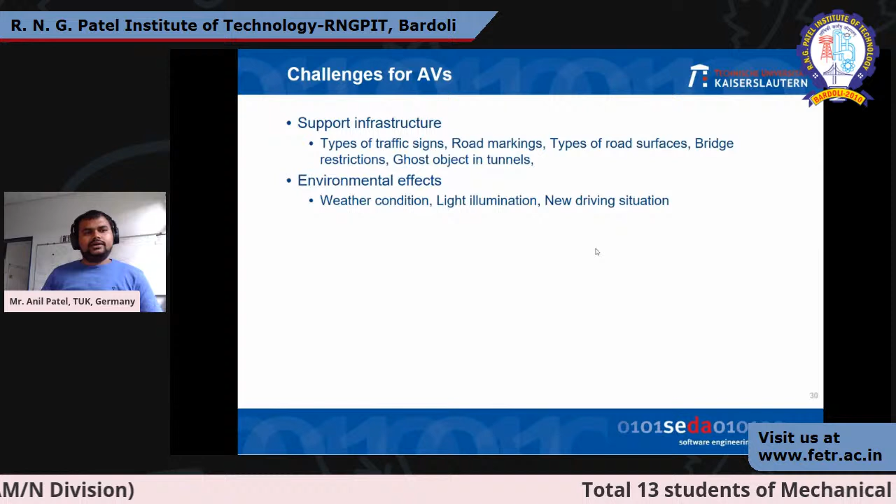The second is environmental effects, so weather conditions, or if you put a camera in front of the sunlight, it just blinds it, so that also affects the performance of the AV.

There is vulnerable population, of course. Pedestrians coming into the street can create a safety critical situation for autonomous vehicles.

The localization support navigation, global navigation satellite system availability is very low due to weather conditions or infrastructure not being available.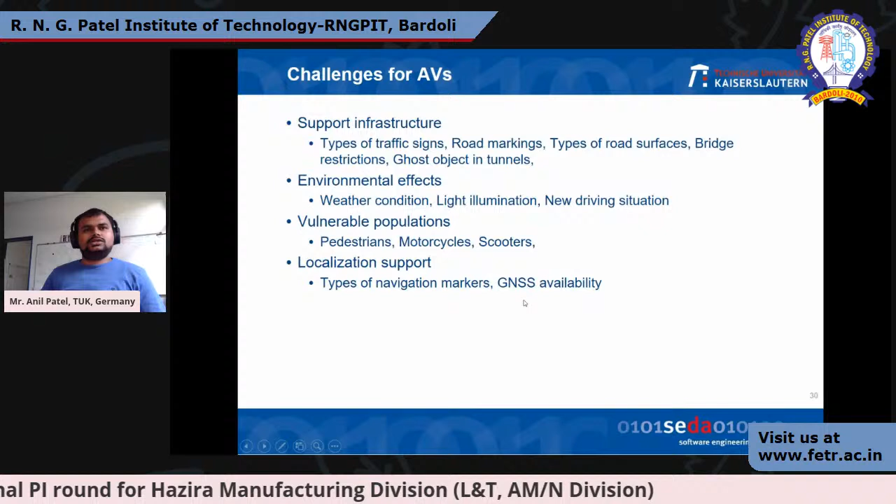Then compliance with traffic rules, traffic regulations are different from country to country, so we have to take that into consideration when it comes to development of autonomous vehicles.

And then there is vehicle to infrastructure communication. The interaction with the outside infrastructure and cloud data is really important when it comes to autonomous vehicles.

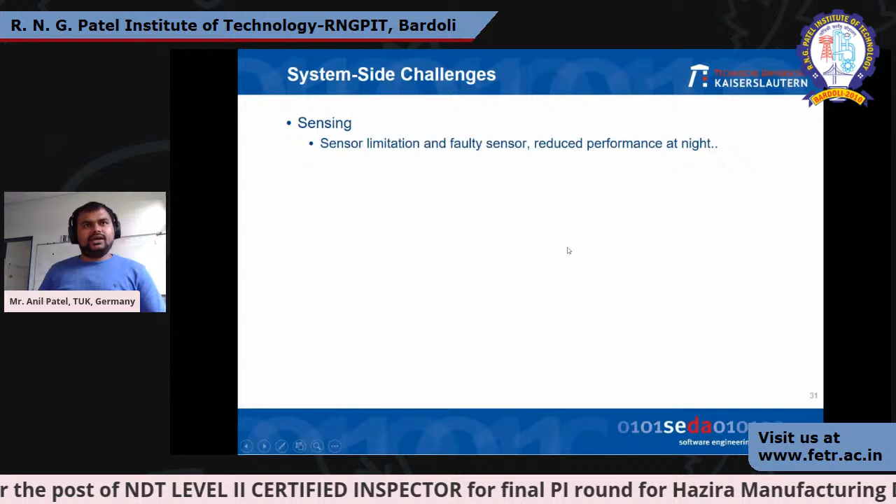However, there are also challenges on the system side. Sensor limitation and faulty sensors can reduce performance at night, or in weather conditions your radar will not perfectly detect an object in rainy or snowy conditions.

The perception, it's a wrong perception of the object. Distortion in rain or glaring in the environment can also cause an error on the system side.

Unplanned behavior - even if you don't plan for such behaviors, the vehicle predicts that behavior and behaves in an unprecedented way that we cannot predict.

The prediction - again, wrong prediction, sudden changes and optical illusion can also cause an error on the system side. Then there is artificial intelligence.

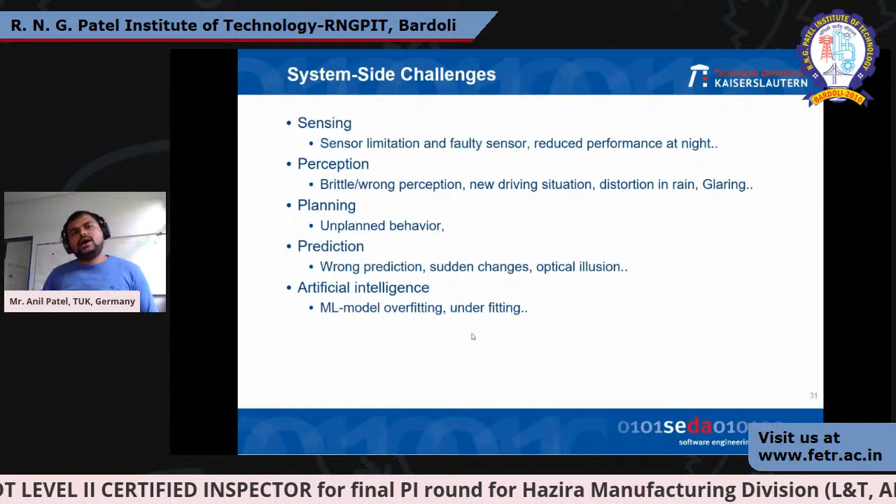So you train your model with lots of data, and then you have overfitting and underfitting. The things which you have to predict, you can overfit or underfit without any kind of error, and that can also lead to an error on the system side algorithm.

Then there is loss of reaction time, because as we saw in our first video of an accident, even if the sensor predicted there was a pedestrian, it won't react in time. So the loss of reaction time could cause a loss of life, and that's what happened.

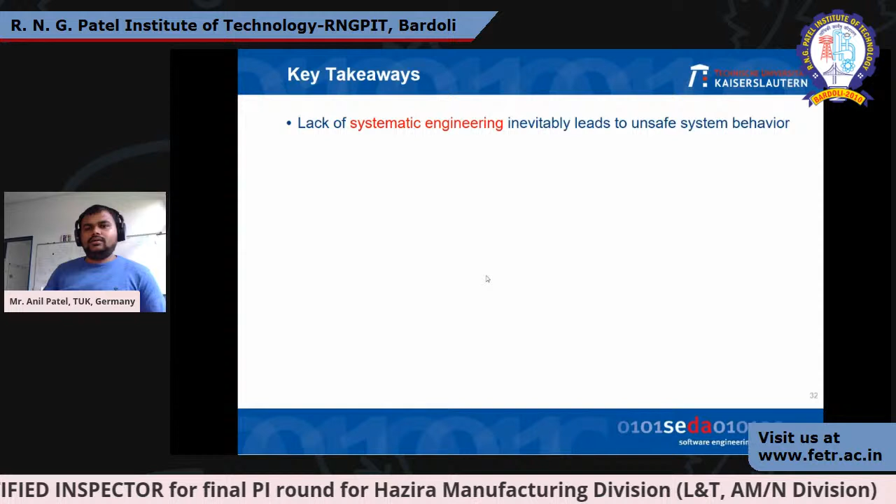So what are the key takeaways from these webinars? First is lack of systematic engineering, which leads to low quality similar to software engineering, and comprehensive understanding of process models and techniques are also needed.

The second is risk acceptance - until what risk value can we accept when it comes to autonomous vehicles. There are still challenges, and the roadmap for safety engineering in autonomous vehicles is far ahead. You have to think about those challenges as well.

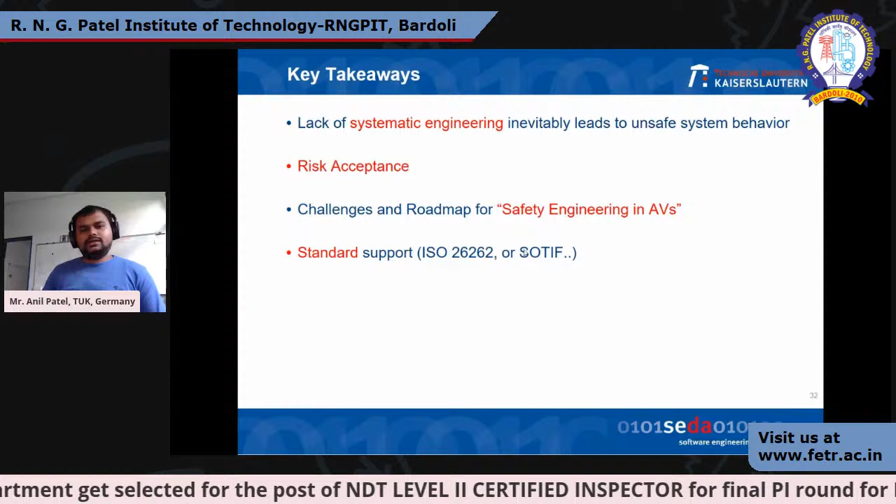Of course, we can take support from the standards which are available. This support is needed, especially when it comes to critical properties such as safety. The question is, what are the starting points to realize such a systematic engineering process for autonomous vehicles?

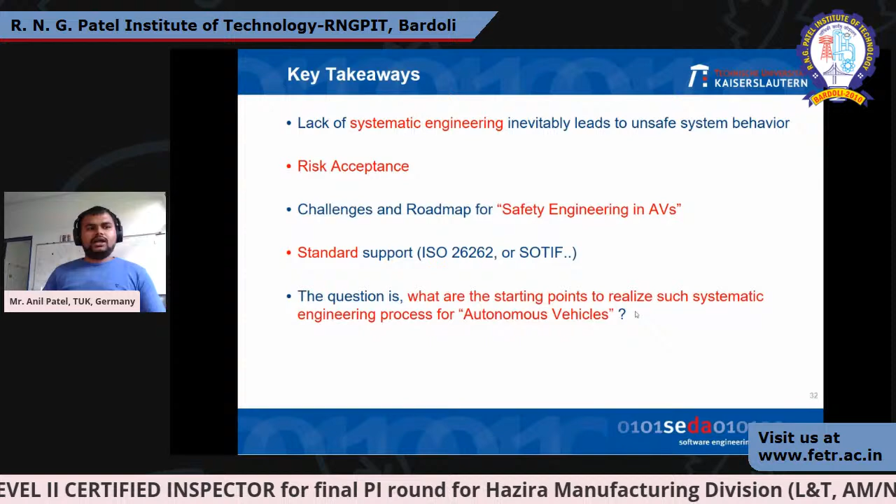A country like ours has a very dynamic population and behavior when it comes to road vehicle safety. So from where to start? I think we have to start from scratch to develop systems that support the driver, so that we can minimize human error.

Statistics from 2015 say that 80% of road accidents are caused by the faults of the driver or passenger. If we can minimize that by even 50%, we can reduce 50% of road accidents. So we have to provide such systems to drivers - collision avoidance systems or emergency brake assistance systems - standardized into the car, so that it cannot collide with other vehicles, and loss of life can be saved in our country.

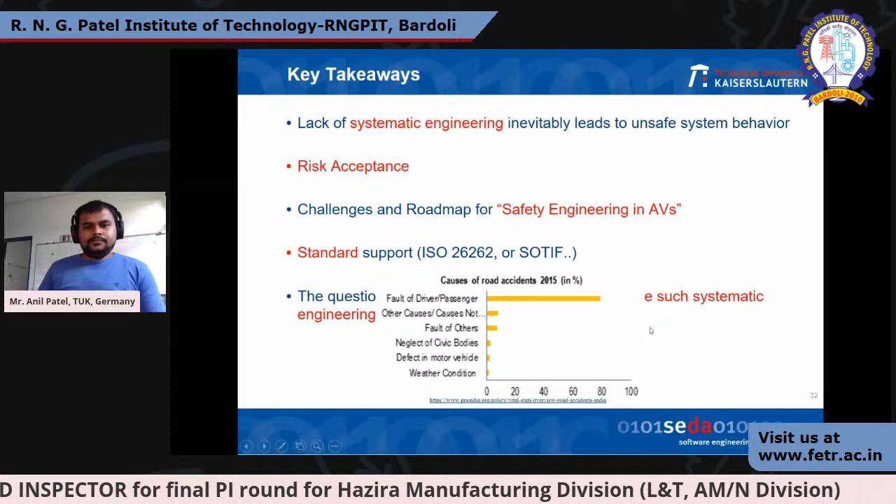So far, some remarks regarding this webinar. What is the pace of autonomous vehicle development in the world? I'll show you the map - Initiative on Cities and Autonomous Vehicles.

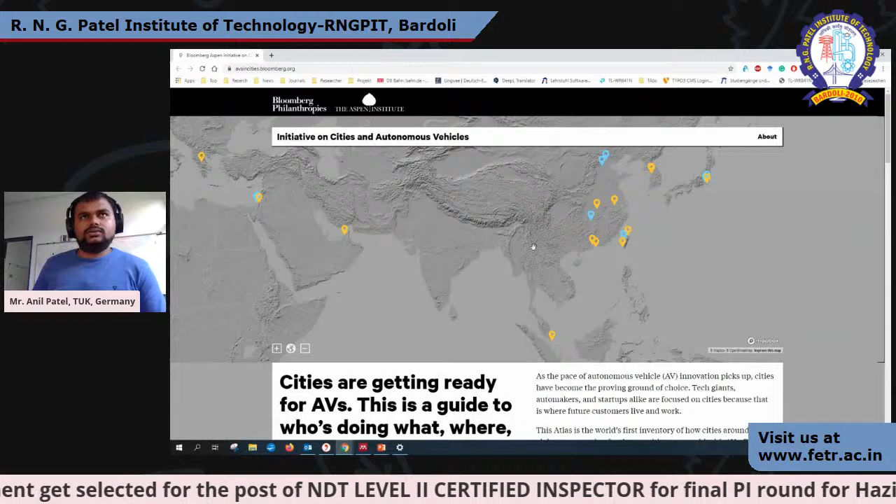And the last part - I told you about life in Germany after a bachelor's degree. So why Germany? I think there are no tuition fees like in the US and other English-speaking countries.

Public universities in 15 of its 16 states charge no tuition fees to students. The international campaign was commissioned by the German Federal Ministry of Education and Research, and the idea is to increase the number of highly qualified foreign students at German universities. That's why there is no tuition fee regardless of nationality.

There's a history of innovation and ingenuity - you all know about German technologies as well. It has a proudly international outlook, with students from South America, Europe, and other parts of the world. So you also get an international outlook, and affordability which is very convenient for our students, Indian students especially.

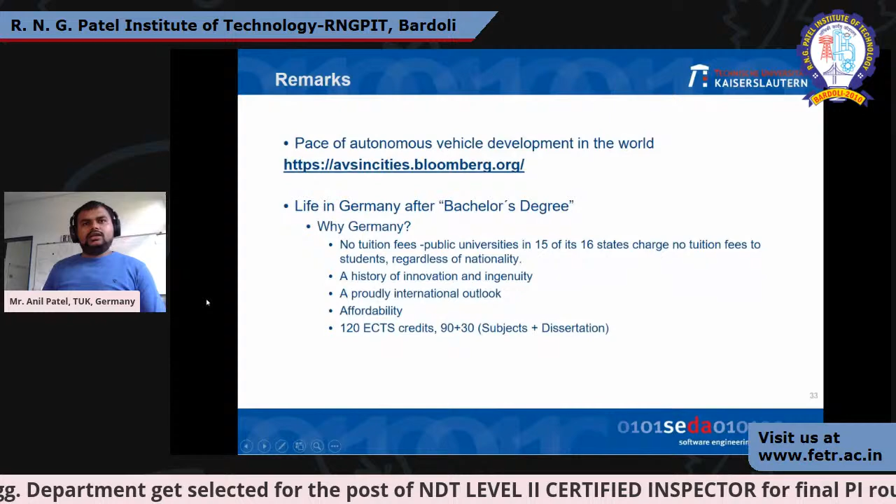Compared to any other English-speaking countries, there are 120 credit point master courses - 90 from subjects and 30 from the dissertation. You can check that out. There are 400 universities in Germany and more than 20,000 degree programs, so that's quite a lot of choice - you can look into that also.

At my university, TU Kaiserslautern, where I'm working right now, there are different kinds of master courses available in English. I studied an interdisciplinary program called commercial vehicle technology. You can also look for biology, computer science, and other programs of interest, and if you want more information, you can log into this website.

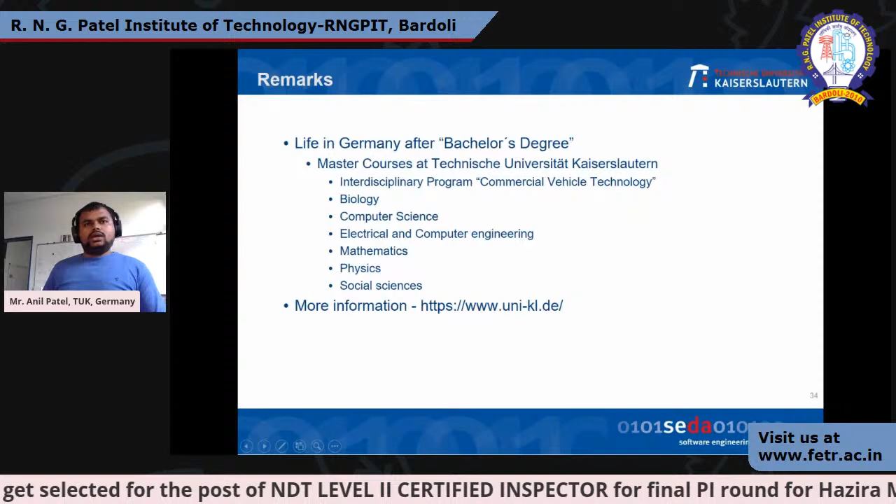There are many agencies working on education in Germany - you can contact any of these, or get information on this website as well. So yeah, thank you for your attention, and get in touch with me for further details. If there are any questions, I'm open to them.

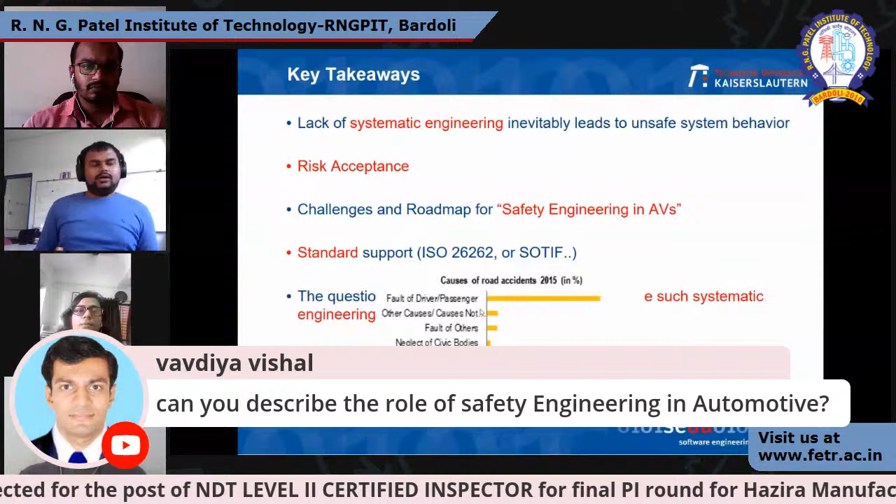But on a passive side, you don't have an anti-lock braking system. You don't have ESP, which is the stability program, and all those functionalities should be there. It's not included in a vehicle in a way that it should be there. Somehow the problem occurs when the functionality stops working, or it's manipulated with some kind of errors. So that's what we have to take into account.

Okay, and one more question. Is there any need for special lanes for autonomous vehicles on expressways? I think there is no need for any special lanes for autonomous vehicles, because they also have a lane keeping assistance system. So if you are driving in the right lane, your vehicle will just drive in the right lane without any maneuvers. But if the front vehicle brakes, it has to maneuver to the left lane. So some kind of functionality is already there, which is called lane keeping assistance system. We don't need special lanes for autonomous vehicles.

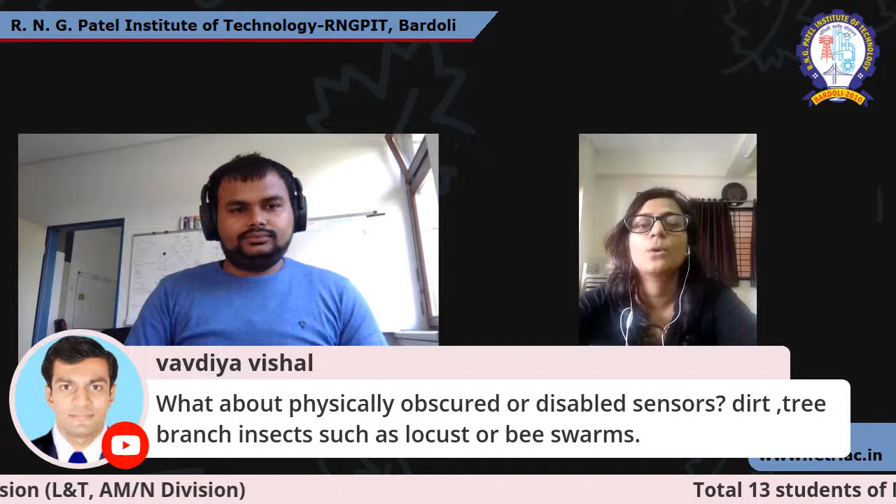Okay, and sir, one more question. What about physically obscured or disabled sensors? You have explained that there are environmental challenges, like tree branches, insects, bee swarms or locusts. So how is it managed? How are sensors useful? So there comes the sensor fusion part. I think it's a nice question that Vishal has asked.

So sensor fusion means you have a radar sensor, a LiDAR sensor, and vision sensors, like high definition cameras on all parts of the front side of your car. If one sensor doesn't function correctly, you can rely on another one. If a small radar sensor fails, you can rely on LiDAR and so on. So there you have a barrier of safety.

So if one radar fails, you have LiDAR and camera sensors. When your LiDAR and radar both fail, you still have a camera, and if all sensors fail, the functionality has to stop. You cannot drive in autonomous mode anymore because all sensor modes have completely failed.